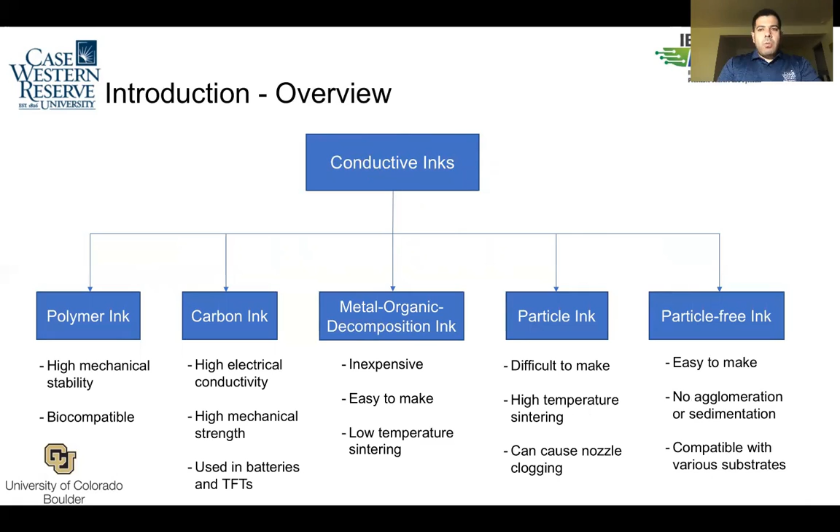To begin with, I'm going to shed light on the types of conductive inks, the commonly used flexible substrates, and the ink sintering method. Starting with conductive inks, what are the common types of conductive inks? They can be categorized into polymer ink, carbon ink, metal organic decomposition ink, particle ink, and particle-free ink. Now, in the interest of time, I won't be able to go over each ink type, but I will shed light on the last two, particle ink and particle-free ink.

Particle ink is normally not easy to make. They require some expertise, and in order for them to be sintered, they require high temperature. And because they have particles, even at the nano size, they can still cause some nozzle clogging. As for the particle-free ink, they are easy to make. That's the ink type that we used. We made it in the lab. And because they are particle-free, there is no agglomeration or sedimentation issue. In addition to that, they're compatible with various substrates.

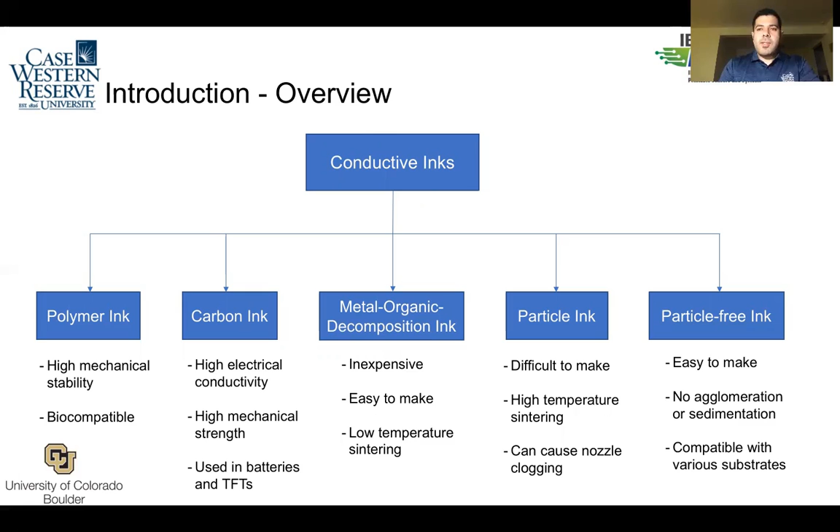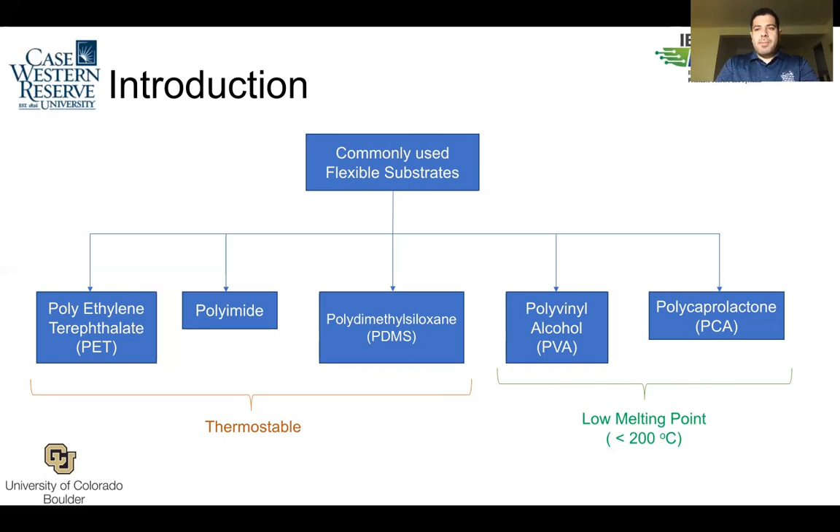Speaking of substrates, what are the common flexible substrates used in inkjet printing? We have PET, polyimide, PDMS, PVA, and PCA. The first three are thermally stable. They can withstand high temperature, so there is no issue if you want to print a metallic ink on these substrates and then cure them at high temperature. But as for PVA and PCA, they have a low melting point, below 200 degrees Celsius. So high temperature annealing will not work on these substrates if you are to sinter them.

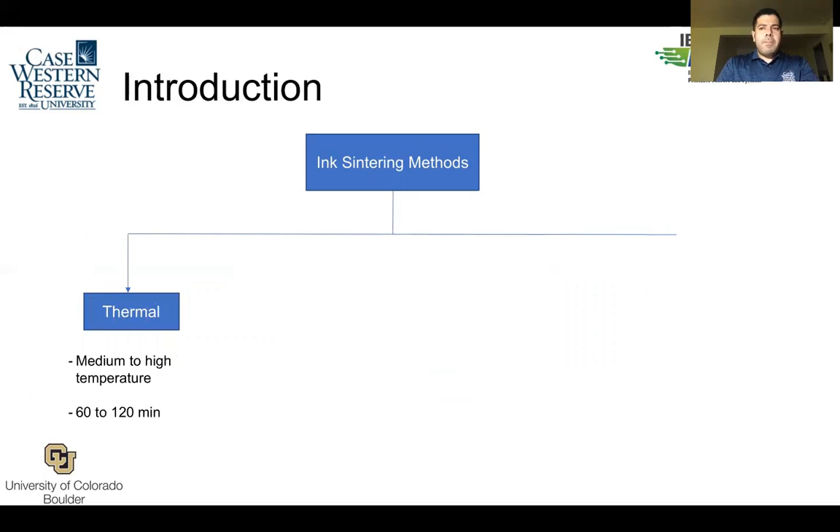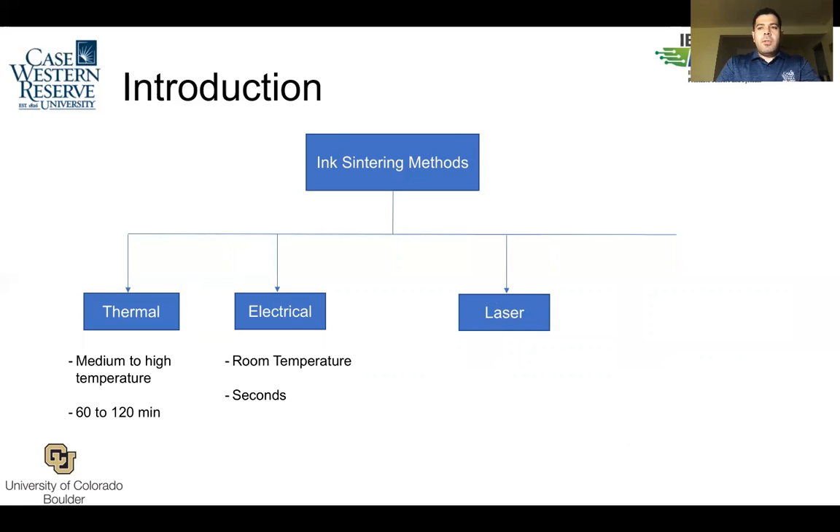What are the ink sintering methods? Very quickly, you have thermal sintering, medium to high temperature, takes an hour or two. You have electrical sintering, it's done at room temperature, but takes seconds, that's faster than thermal. There's even faster than electrical, which is laser sintering, and it utilizes transient localized heating. This laser sintering takes a fraction of a second. The last one is plasma reduction. This is the ink sintering method that we use in our work. Plasma reduction is low temperature, below 100 degrees Celsius, and it takes minutes.

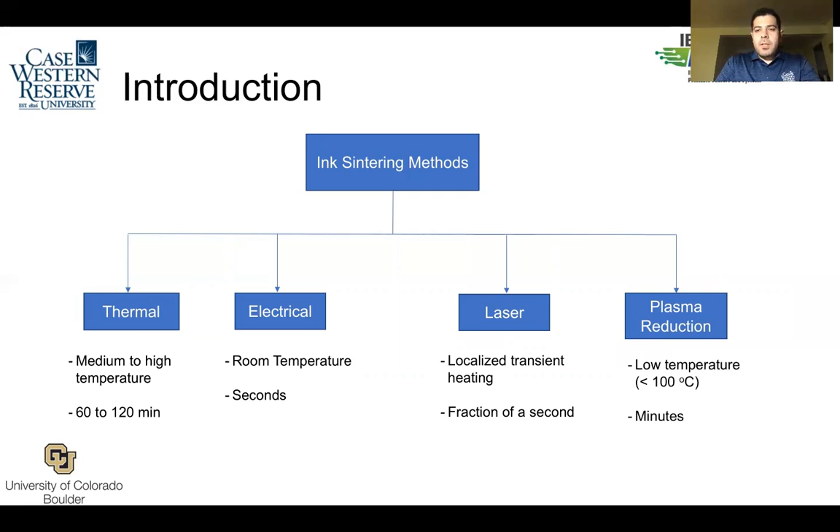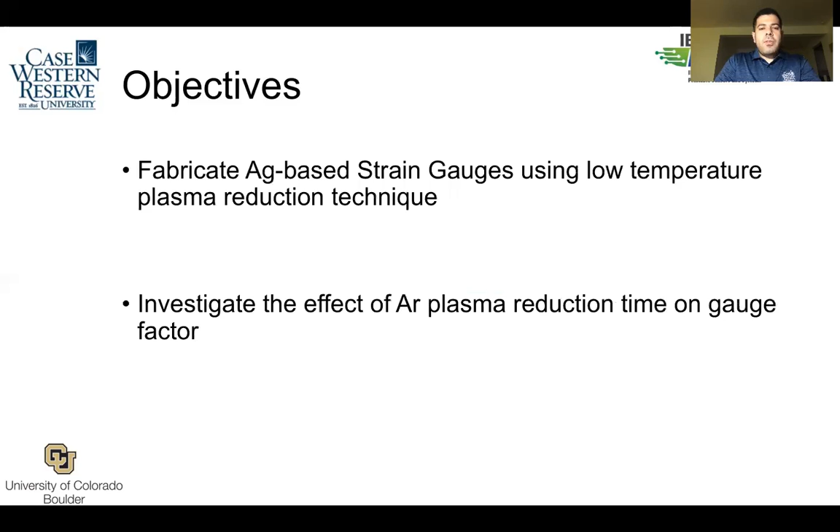That's the introduction. Let's move on to the objective of our paper. The objective is to fabricate silver-based strain gauges using a low temperature plasma reduction technique. And we're also going to investigate the effect of argon plasma reduction time on gauge factor.

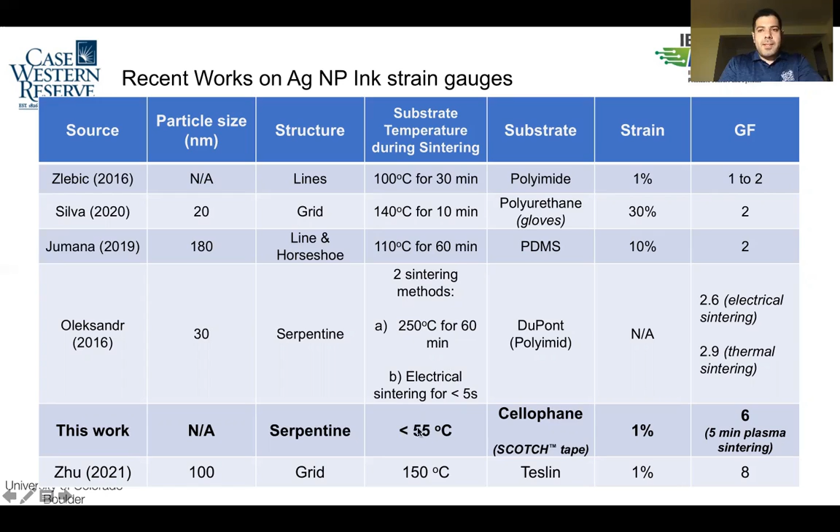The common substrates used were polyimide, polyurethane, PDMS, polyimide, and Teslin. But if you look at the substrate temperature, you will see all of them use medium to high temperature, at least 100 degrees Celsius, for 10 minutes to 1 hour. The curing time varies depending on the structure and the particle size. While for our work, our substrate temperature during sintering was much less than 100 degrees Celsius. It was 55 degrees Celsius, and we printed our silver ink on cellophane.

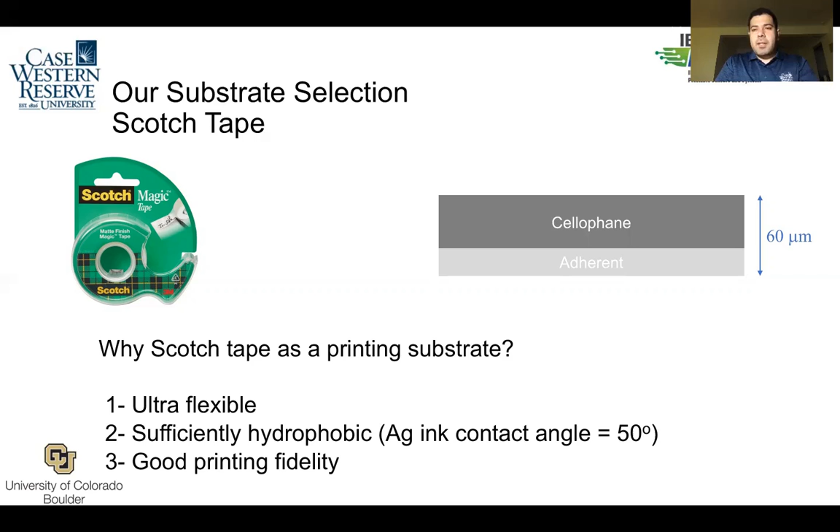Speaking of cellophane, why did we choose cellophane or Scotch tape? Scotch tape is a cellophane material, with one adhesive side at the bottom, and has a thickness of 60 micron. One advantage of cellophane tape is it is very flexible and also sufficiently hydrophobic. We tested the silver ink contact angle, which was about 50 degrees, and thirdly it has good printing fidelity. We printed a couple of structures, meandering structures, and they have good printing fidelity.

So before we print a strain gauge on the cellophane tape, we had to test its elastic limit. How do we do that? We brought Scotch tape onto a tensile tester.

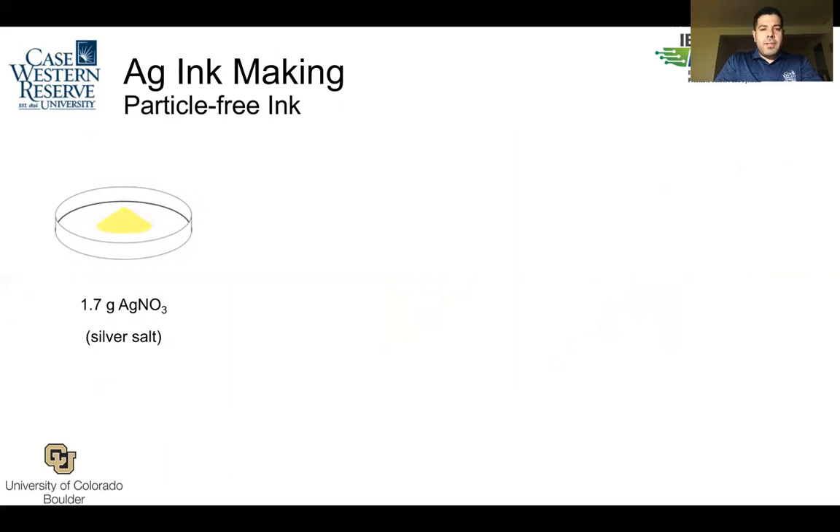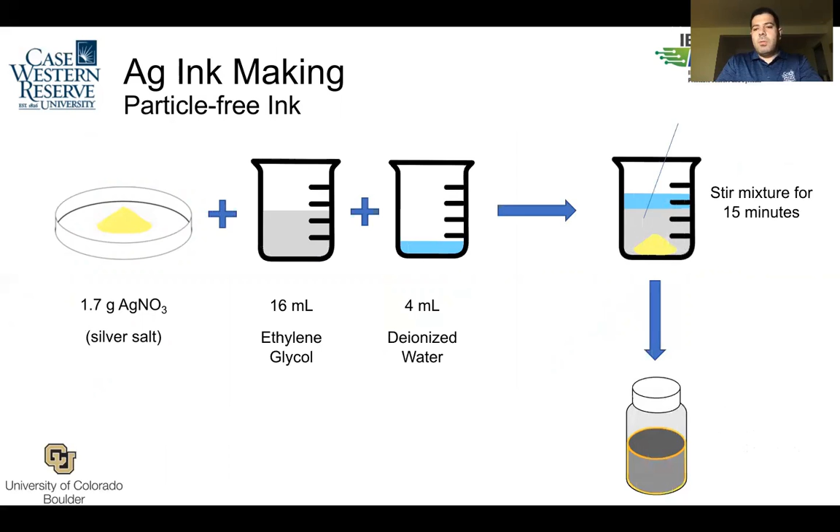How did we make our ink? We brought 1.7 grams of silver nitrate. We mixed that with ethylene glycol and deionized water. We stirred them for 15 minutes, and we poured that into a vial. We let this sit for 24 hours. After 24 hours, we loaded that ink into a printer cartridge.

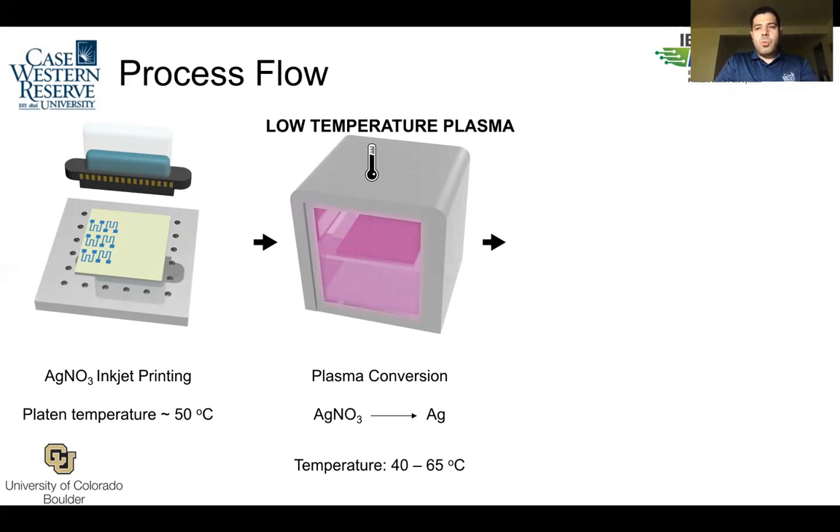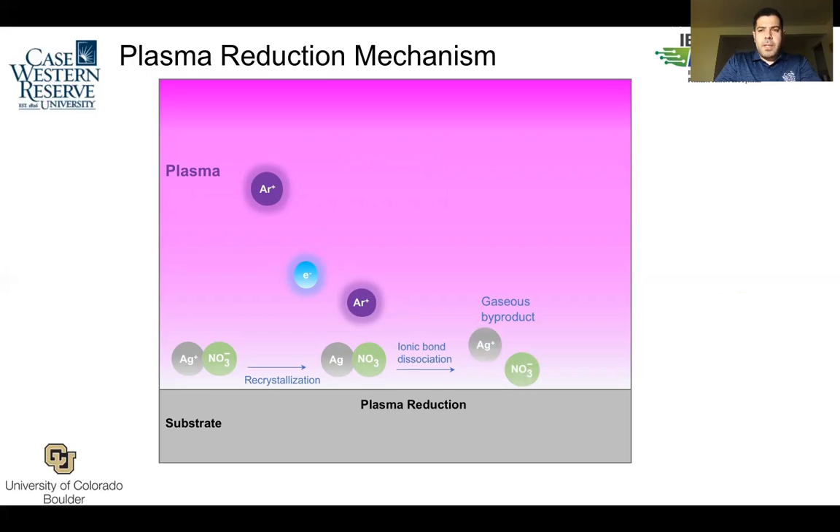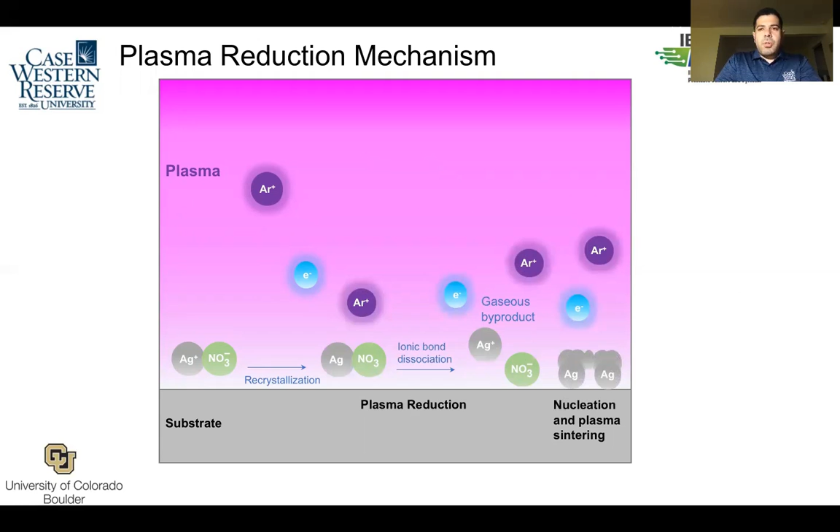With the addition of electrons, the nitrate evaporates, leaving ionized silver atoms behind. And with the generation of secondary electrons, the silver atoms nucleate and sinter. The longer the plasma exposure time, the greater the nucleation and plasma sintering.

So here are the results. The picture on the right-hand side shows you a sample of the strain gauge. On the left-hand side, you have a plot of resistance versus plasma duration from 5 minutes to 30 minutes. At 5 minutes, the resistance was 1600 ohms. At 30 minutes it was nearly 100 ohms. You see that the resistance decreased exponentially from 1600 to 100 ohms. So after we plotted this, we know the longer the plasma exposure, the greater the conductivity.

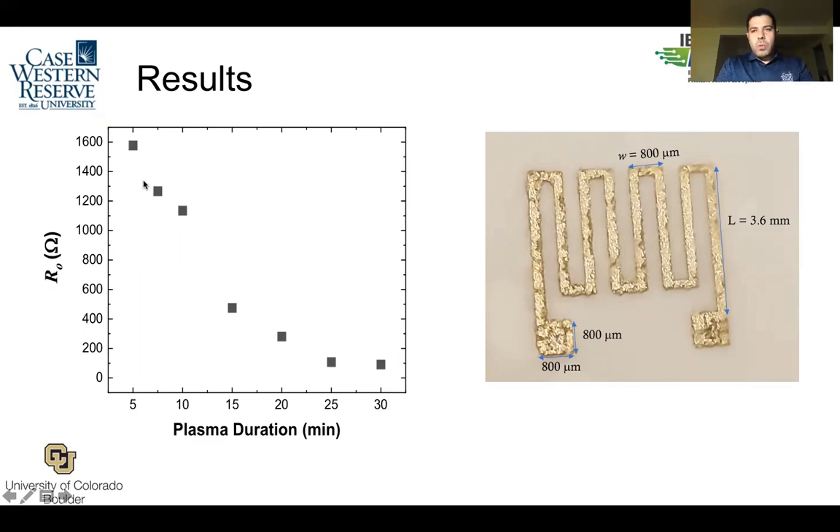And then we wondered, why shouldn't we test the gauge factor at each plasma duration, what will we get? This is what we got. Here you have a curve of normalized change in resistance versus strain. The plot on the right-hand side is merely the slope of this curve, which is the gauge factor. The gauge factor at 5 minutes equals 6, decreased exponentially, as was the case with resistance, and you see it plateaued after 20 minutes.

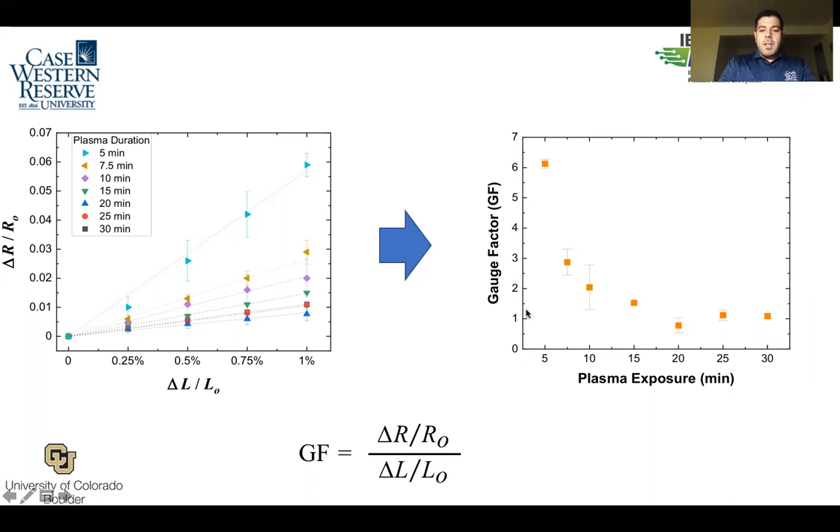So you may ask, what's the science behind that? Why did the gauge factor decrease as we increased plasma exposure? For shorter plasma exposure, you have a thin silver film. When you have a thin conductive film, you increase electron scattering. That contributes to the total resistivity of your sample. You get a higher resistivity. Higher resistivity means when you stretch the sample, you'll get a higher delta R, and that translates into a higher gauge factor.

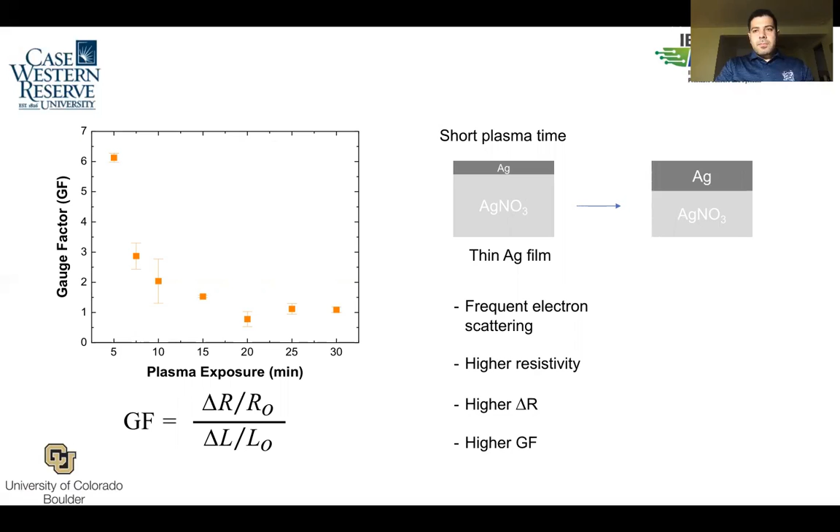For longer plasma exposure, you thicken the silver layer or film, which reduces electron scattering, which means lower resistivity, lower delta R as you stretch the sample, and that translates into a smaller GF. So that's what we think is the science behind the decrease of the gauge factor.

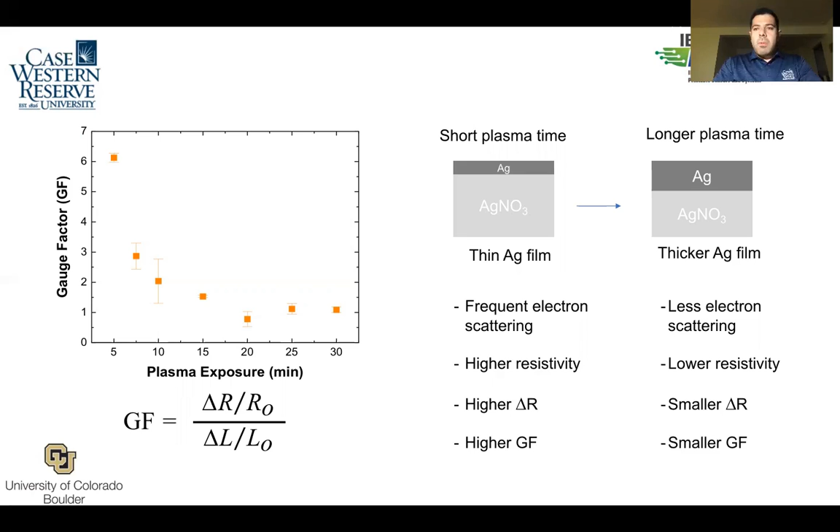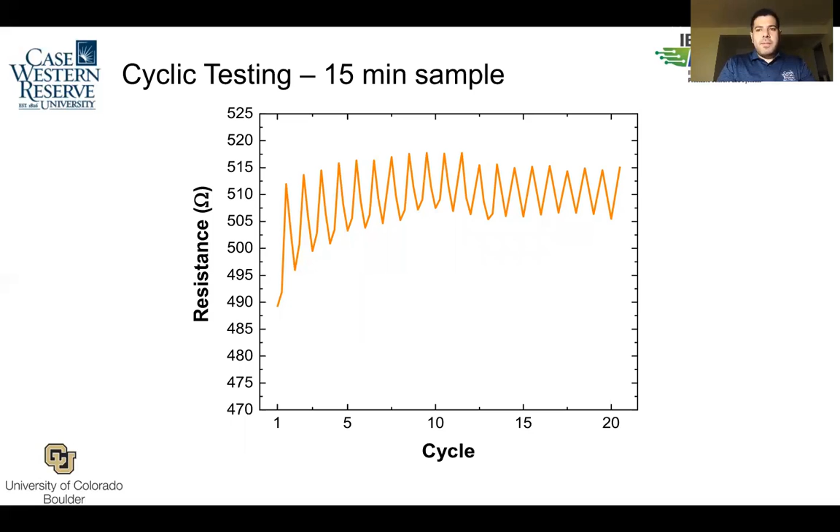Then comes another question: what about cyclic testing? What is the repeatability of your device? We tested a 15-minute device, as you see here in this plot, and the resistance varied from 490 to 515. The burn-in period was from cycle 1 to cycle 10, after which it began to stabilize from 515 to 504, 503. So we could claim that the strain gauge printed on cellophane tape is repeatable. But for further process development, it could also be used as a prototype.

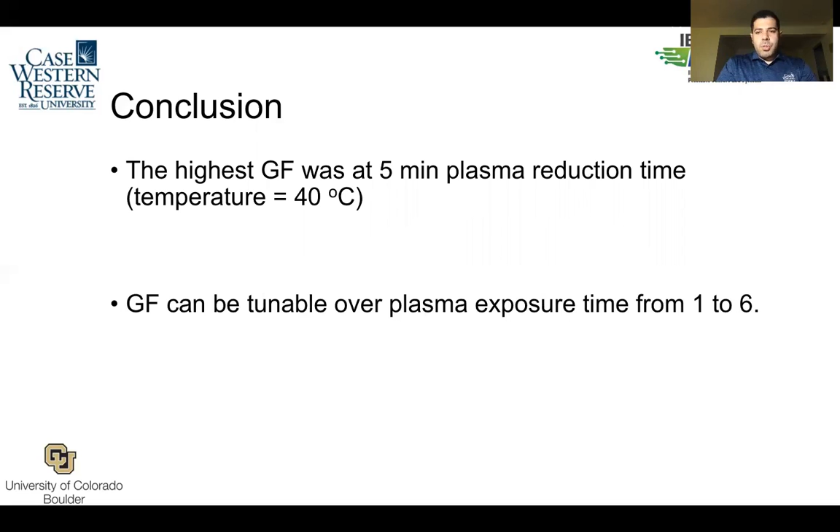In conclusion, the highest gauge factor we obtained, about 6, was at 5 minutes when the sintering temperature was at 40 degrees Celsius. The gauge factor is tunable over plasma exposure from 1 to 6. And with cyclic testing, we showed that our sample had good repeatability over 20 cycles. This concludes my presentation.